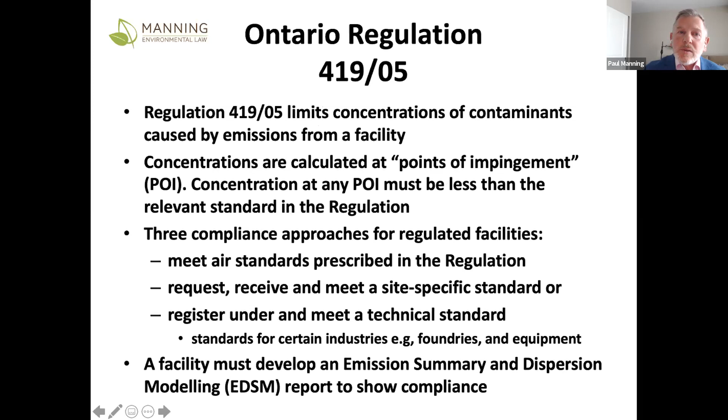So when you need to use an ESDM report - you must prepare such a report if you're applying for an environmental compliance approval, which we've discussed, if you're applying for a site-specific standard which exceeds an upper risk threshold, those thresholds being defined in the regulation. If the ministry makes a request to you to prepare such a report, then you're going to have to do that. And if you're in a sector...

Sorry, my technological mastery has fallen by the wayside here.

So in the last situation, if you're in a sector listed in Schedule 4 or 5 of the regulation, then you also have to prepare a report. The reports must be updated annually. That's not crystal clear from a reading of the regulation, but that's actually how the ministry interpret it, and more importantly, how they enforce it. The report must be accurate as at December 31st in the year the report was prepared. And if it needs to be updated, that update must be completed no later than March 31st in the following year.

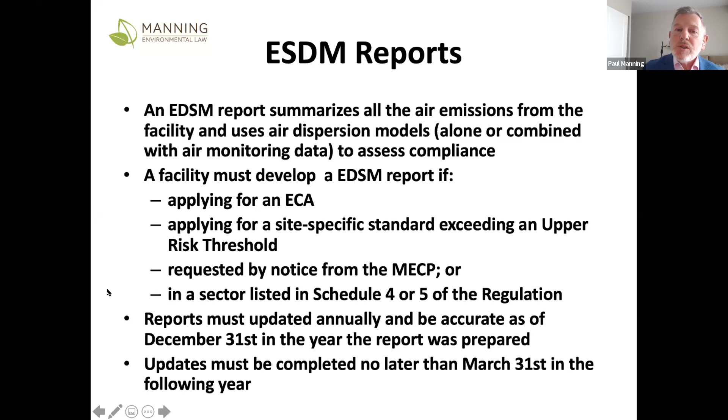So we've gone through those slides fairly quickly, because that's a build up to the purpose of this webinar. And the purpose, apart from giving context and an environmental regulatory overview of how air emissions are regulated, is that we have a bit of news: back in February 1st of this year, there was a change so that all facilities now have to comply with the standards in Schedule 3 of the regulation. That is the end game of what has been a 10-year staged, phased introduction of these standards. So this year is the first year when all facilities have to comply with Schedule 3 concentrations.

Also, the air dispersion models which you can use have changed. The old Regulation 346 air dispersion models have been phased out, and you can now choose from Screen 3 or AERMOD to assess compliance with the air standards in the schedule. You must also use the ASHRAE method to assess same structure contamination.

So for any facility where you had to submit an application for an environmental compliance approval on or after February 1st, 2019, you were already asked to demonstrate compliance using the new standards and the advanced models. And so new ESDM annual reports and annual updates for 2020 and thereafter must comply with the Schedule 3 standards and use the new air dispersion models.

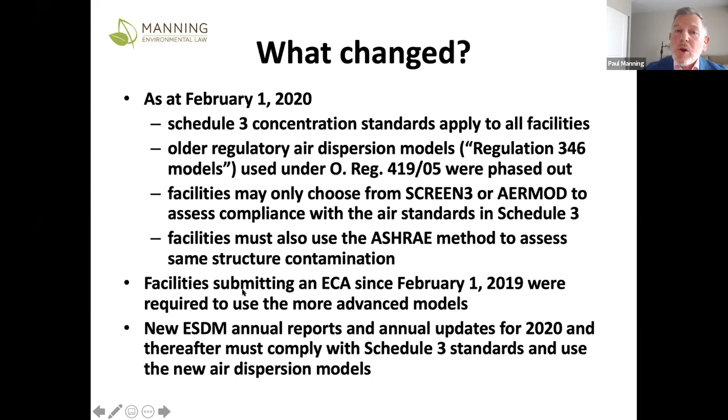So what if you exceed the new standards? The problem is you may have been going along very comfortably complying with old standards and using old air dispersion models. And then you get to this year and you're having to use new air dispersion models to prepare your ESDM reports, and also comply with new Schedule 3 standards.

And if you find that you're not in compliance, or otherwise your air emissions are causing an adverse effect - an expression that is defined at some length in the Environmental Protection Act - if you're doing either of those things, then you have to go through a number of steps. Firstly, you have to notify the ministry immediately. That's under Section 28 of the regulation. And then you have to submit, 30 days after that, a written abatement plan recommending steps to prevent and minimize discharges.

And if the upper risk threshold we mentioned in one of the previous slides is likely to be exceeded, you immediately have to notify the ministry and submit an ESDM report for that contaminant within 3 months' time. So those are very strict obligations, and you have to deal with them promptly. If you fail to do it, you may be prosecuted for an offence, so it's important to get those things dealt with very swiftly.

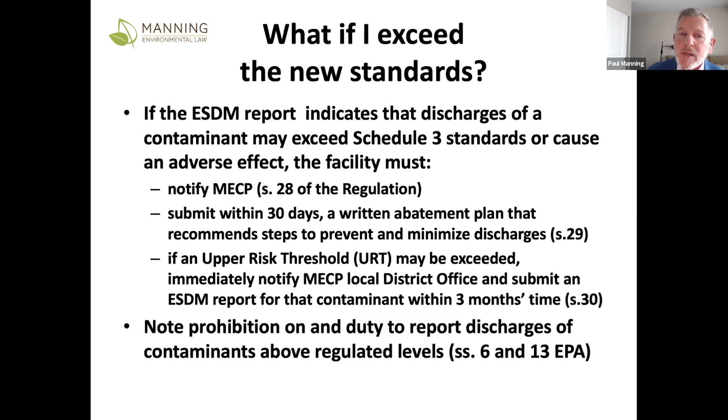If you have the in-house competence to be able to do all these things, then that's terrific. But most industrial and similar clients will need a consultant such as ALTECH to assist them in negotiating what is otherwise quite a minefield of compliance.

So that's, you already heard my biography. Doesn't say that I got a swimming certificate for 25 yards when I was at school, but apart from that, and that is my contact information where you can get hold of me if there's anything of a professional nature.

That I can assist with. And with that, I've tried to keep up a fair pace to make sure there's time not only for Elham's presentation, which you're going to find more useful than mine, I dare say, but also to allow a little time for questions if we have it at the end. Thank you very much.

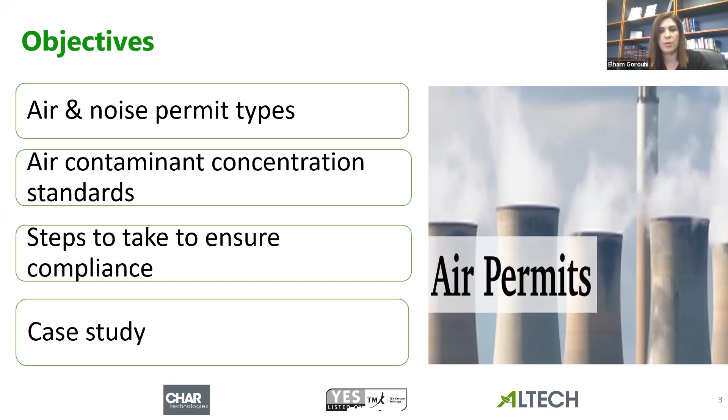We want to run a poll to know more about you and the sector you represent. Please choose a sector that best describes your facility or processes. I'll give you time to answer. We are still receiving answers. It looks like most of the participants are from the general manufacturing sector.

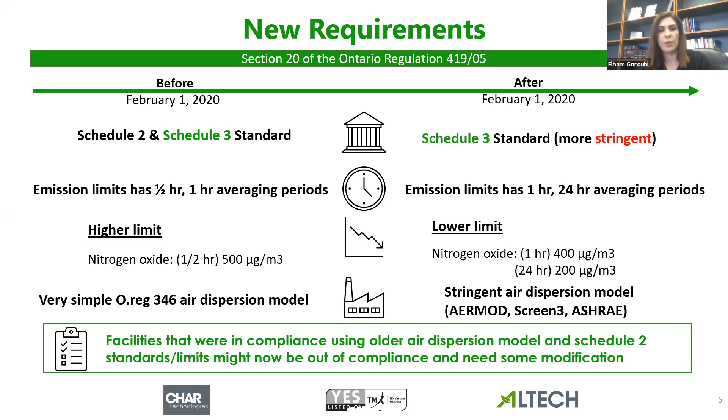The Ministry of the Environment, Conservation and Parks has two approval types: ECAs, or Environmental Compliance Approvals, and EASRs, or Environmental Activity and Sector Registry. ECAs are designed for businesses that may cause more potential adverse effect to the environment. Businesses with less complex operations may register themselves online on the EASR.

Ministry has different EASR types. Most of them do not require assessing of the air emissions, and as long as the facility falls under the requirement for that EASR, they are eligible to register. Ministry also introduced a new EASR in 2017 called Air Emissions EASR. This EASR is designed for industrial facilities with multiple processes that can discharge contaminants to the atmosphere, but the processes are less complex or may pose less potential adverse effect to the environment.

This new EASR process is faster because the registration is online and the ministry review is not required. To register, a licensed engineering practitioner, or LEP, is required to sign and stamp the reports and state its accuracy. It will also help the ministry maintain their 1-year service time for ECA applications.

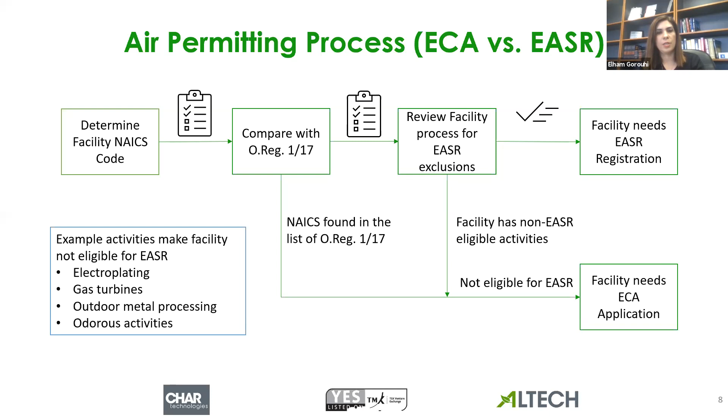All facilities have combustion equipment like HVACs or boilers. Paint booths are producing emissions, including PM emissions and VOC emissions, or some other VOC emissions from chemical consumption like sanitation chemical consumption. Soldering emissions from soldering operations, and PM emissions from cutting, regrinding, or welding, and etc. Some facilities have cooling towers, and the cooling tower emissions should be considered in the air emissions as well.

We also need to review processes and operations that are producing noise or vibration emissions. Rooftop fans are an example of processes that are producing noise emissions, as well as HVAC equipment. Some truck activities and material handling are very noisy and producing noise emissions. Also, emergency generators are part of the noise emitting equipment.

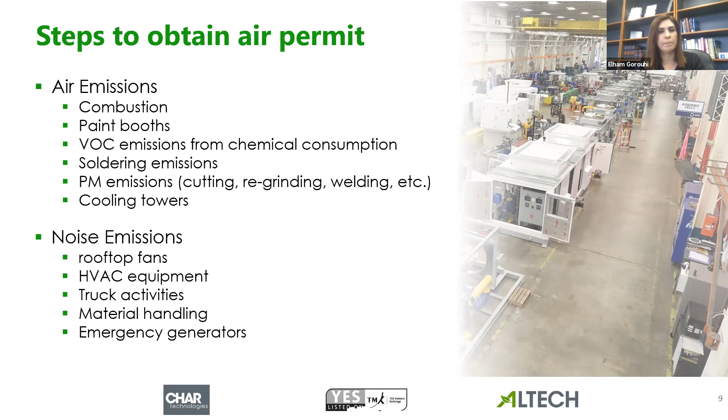After that, we have to determine the worst case scenario for the facility. The worst case could be a maximum production per day or maximum material consumption per day. It could be the maximum operating hours per day or any other worst case condition that applies to the facility. Why should we consider the worst case scenario? Because the production rate and manufacturing activities vary depending on the demand and customer orders, and they're not consistent day to day. So if we are able to show compliance for the worst case scenario for the facility, then the compliance for the other scenarios are also evident.

Then we have to calculate the emission rates for the facility and for each process based on emission factors, engineering calculation, or mass balances. Consider a facility that uses 500 kilograms per hour of raw material. By doing engineering calculation, we determine that 2.5 grams per second of this raw material is emitting to the atmosphere through the stack.

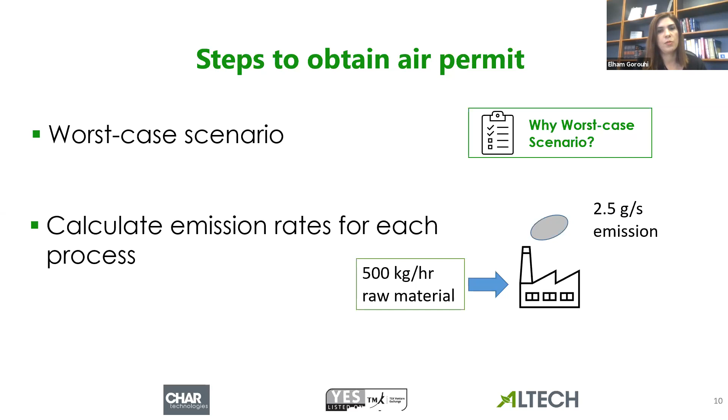After calculating the emission rates, air dispersion modeling needs to be done for the plant. By applying for an air permit, a facility tells the ministry that contaminant concentration outside of the property boundary meets the limits. That's why dispersion modeling comes into play. By doing the dispersion modeling, we determine the concentration of the contaminant at the point it hits the ground after traveling through the atmosphere. This is called the point of impingement, or POI concentration.

If the POI concentration meets the ministerial limits, then we will prepare the ESDM report and all other requirements under ECA or EASR, and register the facility to the ECA or EASR. If not, and the POI concentration exceeds the ministerial limits, we have to refine the calculation based on the facility's updated information, or some facilities may require air pollution control technologies to reduce the emissions.

To refine the calculation, we can revise the worst case scenario, or some facilities decide to cease using a specific problematic chemical or replace it with other chemicals. It is also very critical that facilities provide information as accurate as possible to streamline the process and avoid any delays.

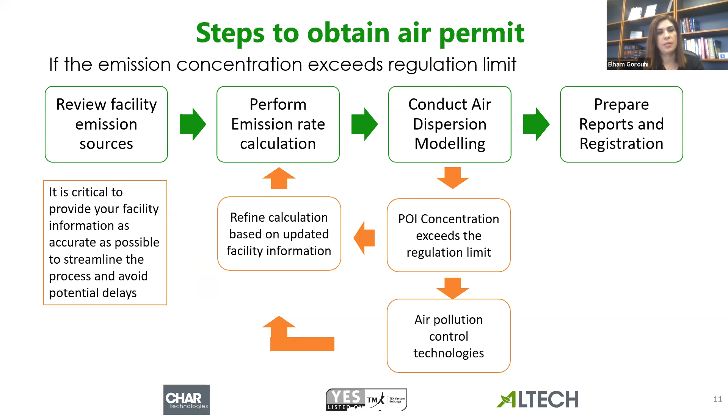This is an example of a plant with different emission sources: idling truck, emergency generator, and manufacturing operations. All emissions from these sources are determined using emission rate calculation, and then we perform the air dispersion modeling to determine the maximum concentration outside of the property boundary. As you can see, the pollutant concentration decreases with distance due to dilution and dispersion into the air. As such, sources with more distance to the property boundary will potentially have less POI concentration.

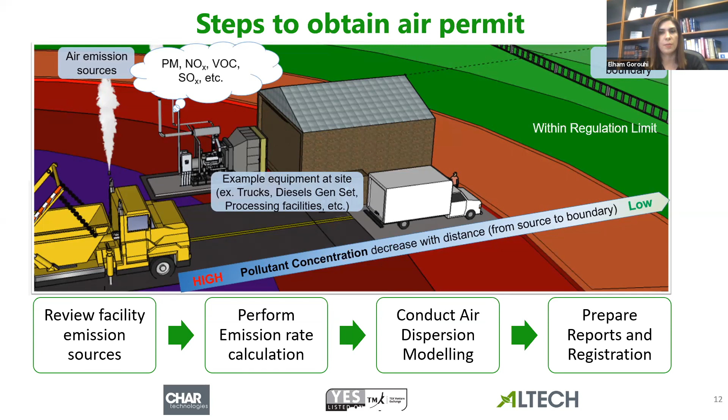The ministry's approved air dispersion model that needs to be used for most facilities to show compliance with the Schedule 3 standard is AERMOD. AERMOD is a Gaussian steady-state plume model, developed by US EPA and adopted by MECP. The mathematical model is shown on the left-hand side. This picture shows how the plume extends and disperses through the atmosphere along the wind direction. The right-hand side movie is the output of the AERMOD computer software.

The plume intensity is shown by contouring colors. The movie is created to show variation of the plume over time on an hourly basis. The actual meteorological data and landscape data is used in the dispersion model. As you can see, the plume direction, length, and intensity changes over time, depending on actual weather conditions.

The highest POI concentration resulting from running 5 years of weather data for the facility will be reported as the highest POI concentration for that contaminant.

I just want to add that this is our office building. We just developed a model to show how the plume changes over time.

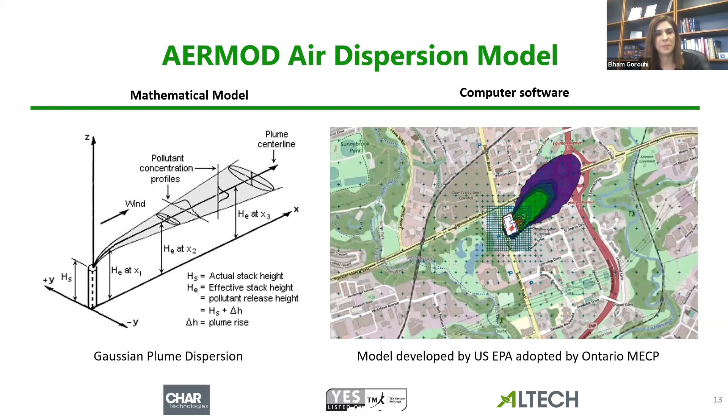Now we want to present a case study of a facility in Ontario. This facility is a plastic manufacturing facility. It has VOC emissions from extrusion and molding activities. It has PM emissions from regrinding, vacuum pumps, and cooling towers. And it has combustion equipment, which is also a source of emissions. The facility has an ECA permit based on Schedule 2 standards and Section 19 of the regulation. The air dispersion model was completed using the Ontario Regulation 346 model, and the facility was in compliance with all these requirements.

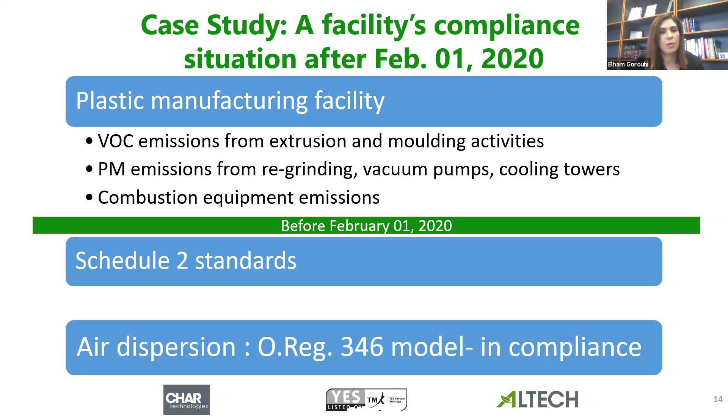After February 1st, the facility made no changes to their processes and operations. The worst case scenario was considered the same as previous, the one listed in their previous ECA application. The emission rates were converted to a 24-hour period based on their operating conditions. Schedule 3 air standards were used to determine compliance, and the air dispersion model was used to show the dispersion. The results showed that some contaminants had emissions over the ministry's Schedule 3 limits, even with no changes in their processes.

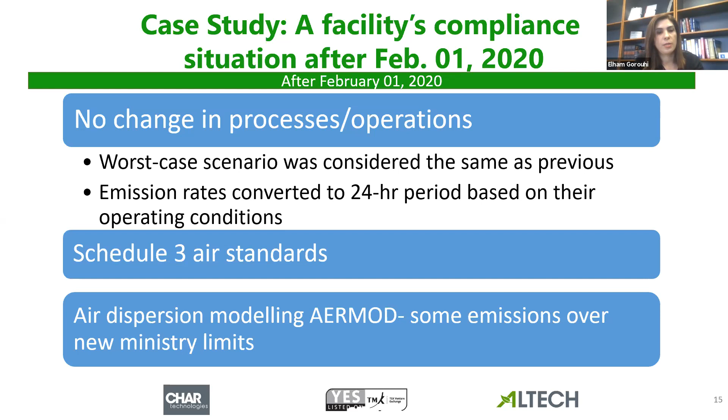So what steps have we taken to ensure compliance for this plant? The first step was to revisit the worst case scenario with facility collaboration. After revisiting it, we understood this scenario was considered very conservatively and that case would never happen at this facility - it was assumed that all molding machines were operating at 100% capacity at the same time. This assumption was revised based on facility consultation, and the calculations were refined based on the new operating conditions.

We performed the air dispersion modeling, and the out-of-compliance components decreased from 6 to 1. They still had one component, total VOC, which was still over the negligibility limits. I just want to clarify that total VOC doesn't have a ministerial limit, but it has a negligibility limit. So if such a substance is over the negligibility threshold, a toxicology assessment is required.

In this case, it was not possible to perform a tox assessment because the total VOC is not a single substance and its components vary depending on the source. So the facility had two options: install an air pollution control technology to reduce the total VOC amount below the negligibility amount, or speciate the total VOC into its components by lab analysis or research data. We chose the second option, and we were able to speciate the VOC content based on the resins they were using. The results showed that the speciated components are all within ministerial limits.

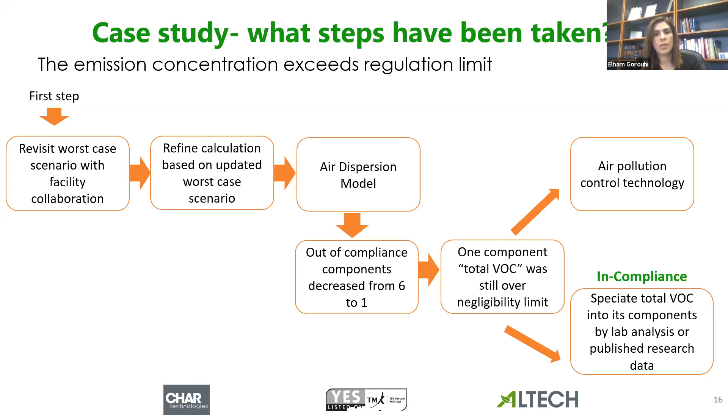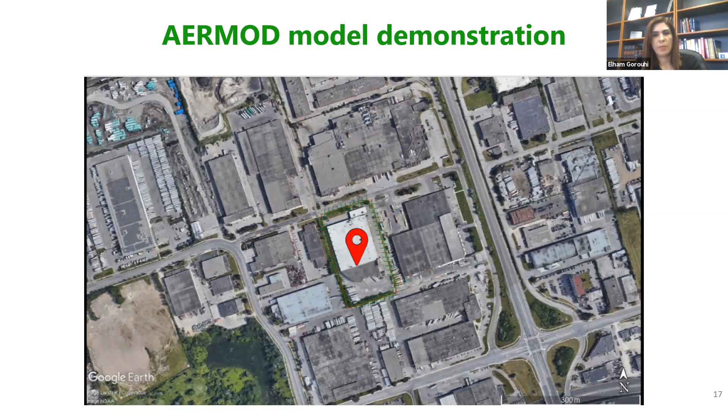This is a demonstration of the air modeling for another client. We show the facility anonymously to protect the client's information, so the quality of the video might be affected by the Zoom recording. I just want to give a heads up, but if you want the full video, we will be able to provide it.

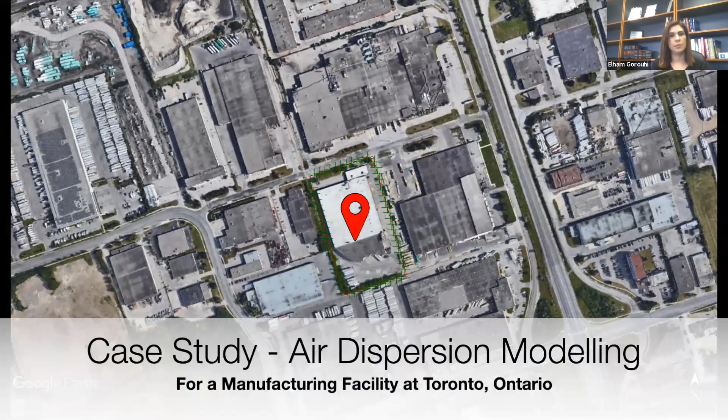Now we would like to present a case study on air dispersion modeling for a manufacturing facility in Toronto, Ontario. Here we have a facility located inside an industrial park. The property boundary for this facility is the green line shown here. Let us switch over to the AERMOD model itself.

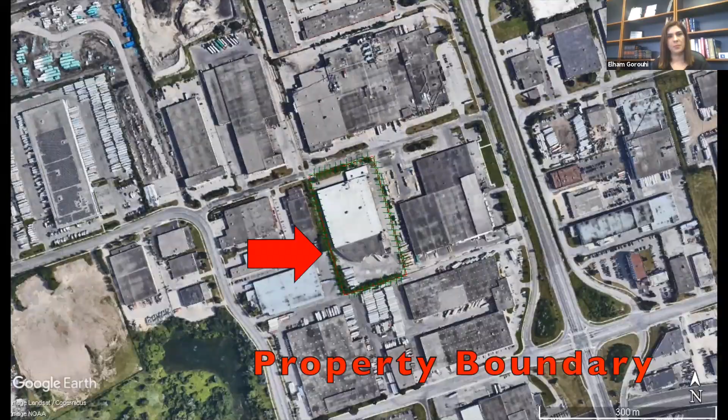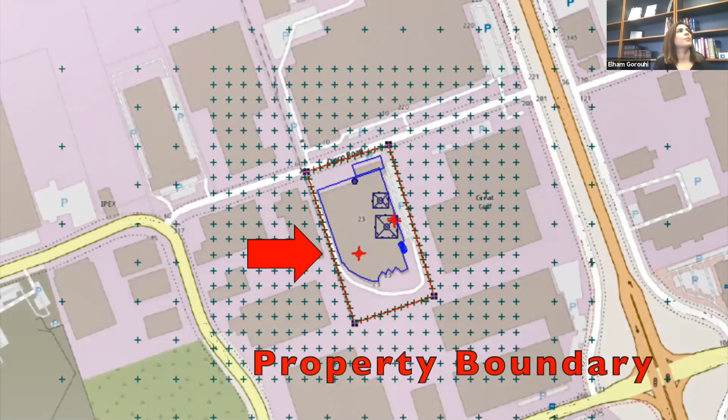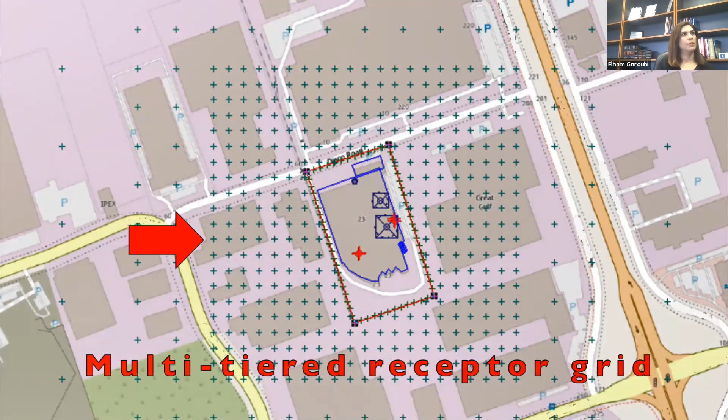Before running the AERMOD model, we need to set up the building envelope, emission sources, and the receptor grid. We can define the exact property boundary based on local zoning maps. The multi-tiered receptor grid consists of over 1,000 green points shown here, spaced out based on their distance from the property boundary. Emission sources are added to the model based on actual stack location, with parameters including exit flow rate, temperature, stack height, etc. We have completed the first step.

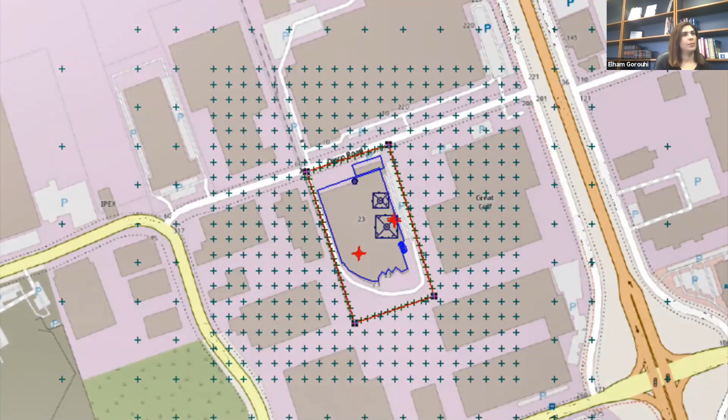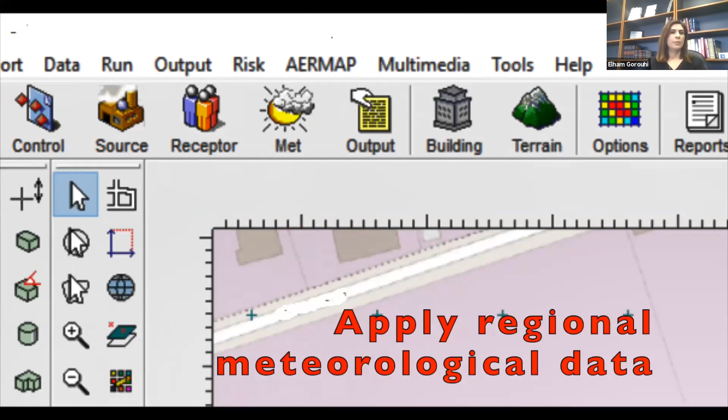Now let's move on to another important aspect of the model, which is the regional meteorological data. These data are collected by the weather station, with two components: surface data and upper air data. The data contains the direction and speed of wind at different elevations.

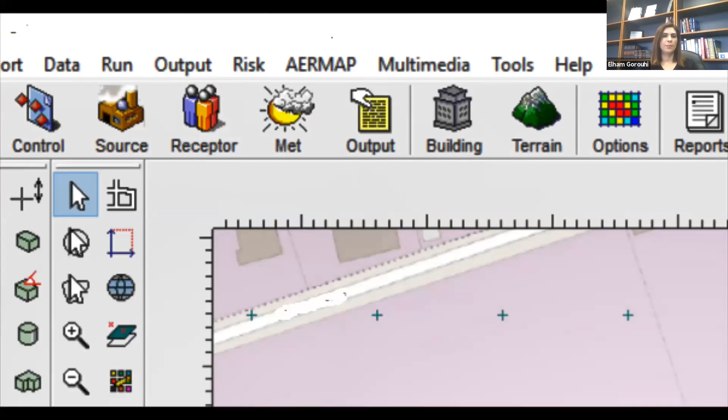Next, we need to apply the regional terrain data and assign elevation points to the model. This step will transform the model from 2D to 3D. Both meteorological and terrain data have a direct impact on the air dispersion modeling result. Lastly, the building envelope is based on the drawing provided by the facility or from a site survey, with exact parameters such as building dimensions and heights inputted into the model. This information is used for building downwash analysis and air dispersion modeling.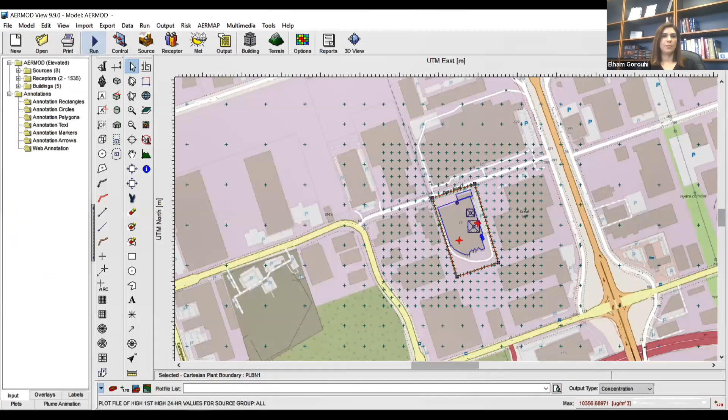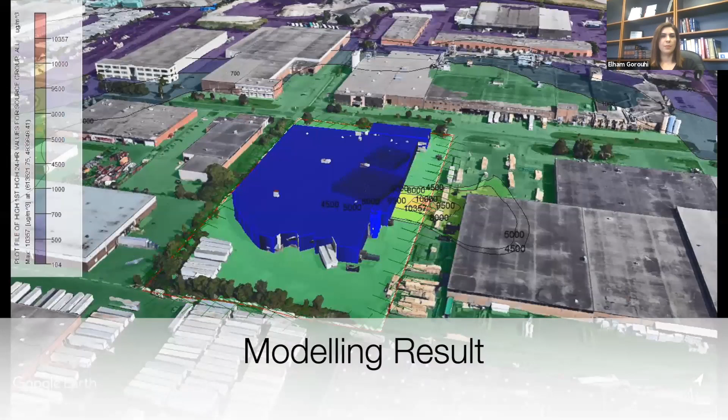Now we have built a highly accurate 3D model, which we can see and verify on Google Earth in 3D. We wanted better inputs because they give us more accurate modeling results. After running the model, we get modeling results with concentration contours, which we can also visualize inside Google Earth in 3D. We can clearly see the locations with higher pollutant concentration.

The AERMOD model is much more detailed than the previous regulatory model because it is based on various modeling parameters that require significantly more work. It can accurately capture a facility's air emission situation for environmental compliance and many other purposes. We hope you enjoyed this short introductory video on AERMOD. Thank you.

To summarize, all plants in Ontario need to be in compliance with Section 20 and Schedule 3 standards as of February 1st, 2020, and they need to assess their compliance with the new requirements. This assessment can be done by updating the ESDM report or simply running screening models. If the POI emissions exceed the ministerial limits, some modification to the operating conditions or to the facility is required, and the plant may need to apply for a new air ECA or EASR permit, depending on the condition. So this concludes this presentation.